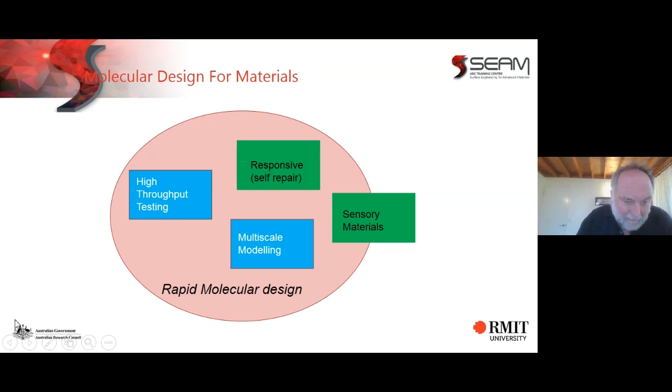Well, there's two methods. One is to do it virtually, by molecular modeling combined with atomic and larger scale modeling, so-called multiscale modeling, or to use high throughput or at least rapid testing to sort through this high level of design complexity. And why is that necessary? This talk, as you gathered from the title, is going to be predominantly about corrosion inhibitors.

Now, corrosion inhibitors are put in the primer of a paint film, or they may be used to passivate the metal surface before the primer goes on, or they may be used as a corrosion inhibiting compound sprayed on a surface, or if it is a pipeline or something like that, they may be injected into the liquid that the pipe is carrying. So there's a number of ways we may use corrosion inhibitors. In our case, we're predominantly talking about them in paint, and therefore they're predominantly in the primer.

So this was work done by Tim Harvey at CSIRO, looking at a family of inhibitors called the mercapto compounds. It's quite complicated, but all that I want you to really see is that if we change in small ways the inhibitor chemistry, we can dramatically change whether it is a corrosion inhibitor or in fact whether it promotes corrosion.

So up on the left-hand side is the different molecular structures, and down the right-hand bottom is the inhibition efficiency, where something on the top is between 90 to 100% efficient. That's a very good corrosion inhibitor, which will cut corrosion down to anywhere from 1 to 10%. If we're on the bottom of that graph, though, we're actually promoting corrosion.

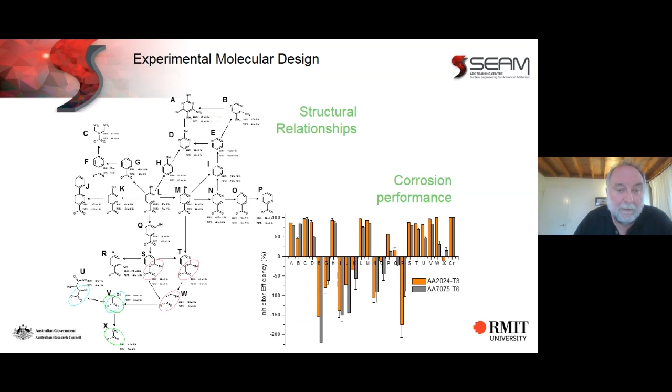And we can see that if we go from inhibitor D with the linker group to inhibitor E without our linker group, we dramatically shift the performance and go from quite a good inhibitor to a corrosion promoter. And similarly, other small changes in the molecular structure dramatically change how the inhibitor performs. So we need to get not only the right type of inhibitor, but the right isomer amongst the different families. So we've traditionally done that by high throughput experiment.

This was work that was developed by Paul White at CSIRO, and he used what is called the high throughput well technique. The wells, you put a saline solution in it, and you put the corrosion inhibitor in it. And then you see the color change after 24 hours.

Where the color has not changed substantially, there's been very little corrosion, and that's given a low number, indicating that protection of the surface was effective. Where there's a lot of change, a lot of corrosion, product builds up, that is showing that corrosion inhibition was not effective, and it's given a high number. So you end up with very complex diagrams like this.

This is deliberately made small, firstly to show you the amount of data, and secondly because this is data derived from Boeing by CSIRO and is confidential in nature. But these charts look at, in one of these squares here, we are literally looking at 1,000 tests. And so this is one test on one material, this is one test on another material, and then there are synergies between different tests. So you're literally at 4,000 pieces of data, 4,000 tests in this diagram.

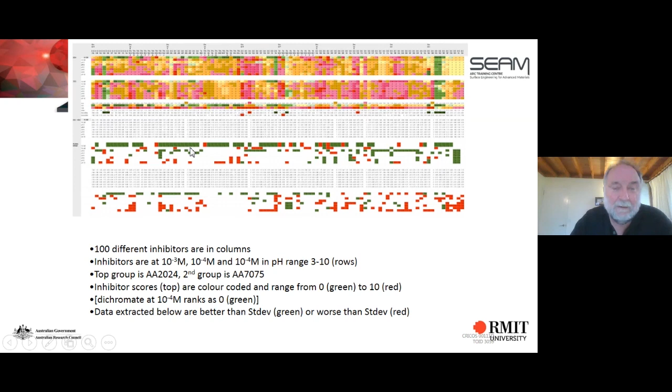And that allows us to spy out the green areas where inhibitors are forming well, and down below, spy out the green areas where combinations of inhibitors are forming well. By using these methods, we can relatively quickly, this program still took a number of years, find what the best inhibitors are, and very importantly, what the best synergy between different inhibitors are.

If you remember what we said before, where we're green on this little chart, I have numbers like 1 and 2, the inhibitor is very efficient. Where we're up at 8 or 9, then we're not stopping corrosion. And we can display that in this little graph down the bottom. The green squares are where inhibition is efficient, and the brown and purple ones are where they're not efficient.

What this shows is by combining an organic inhibitor, its structure's been taken away, with an inorganic one, we can get very strong synergies. So by itself, the organic inhibitor is effective to about 10 to the minus 4 molar in concentration. And the inorganic is not really effective at all. But combined, we can get the combination to be effective when the organic is 2 by 10 to the minus 5 molar, and the inorganic is 5 by 10 to the minus 5 molar.

Why are we so concerned about getting inhibition at low concentrations? Well, there are two reasons. Firstly, in general, as we raise the concentration, the efficiency will remain high. And secondly, when you put your inhibitor in a paint, it gradually leaches out. So the life of that protective paint film is tied to the minimum concentration of inhibitor required to protect the surface.

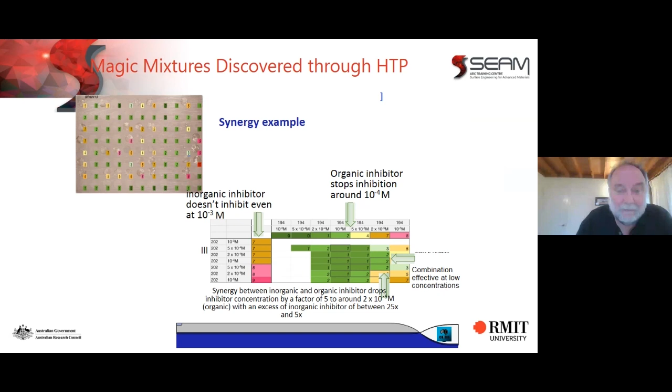Up to now, those surfaces have been protected by strontium chromate. And strontium chromate has done a marvelous job over the last 50 or 60 years. Unfortunately, strontium chromate is a human toxin, and so is being rightly phased out. So all around the world, people are looking at solutions to have non-toxic and at least close to green inhibitors to replace strontium chromate.

Okay, so by using high throughput methods, we can discover inhibitor systems that work in the laboratory. How do we know that they're actually going to work in field conditions? In particular, how do we know that if we paint an aircraft with a paint system containing an inhibited primer, it will protect the aircraft for the period required, which is generally around 20 years?

Now, with strontium chromate, we have a lot of experience, and we know from experience that it will work. We can do long-term tests, and it is mandatory to do at least 2 years of in-field testing for new paint systems for aircraft. However, we only want to go to that massive expense with the final down-selected inhibitor. All the rest, we want to be able to test virtually and know whether we're likely to get that 20-year performance. So how do we go about doing that?

The system that we developed, and this was again between CSIRO and Boeing, was to use multiscale modeling to connect the corrosion and environmental processes from the molecular scale literally up to the continental scale, so that we could be confident that we could accurately predict how an inhibitor in a primer on a paint film on an aircraft would perform over time. So these multiscale models contained a molecular part to look at the molecular features, the HOMO, the LUMO, the dipole, distribution around these molecules that you saw before.

They had part transport models to look at how the inhibitor would be transferred through the paint system and to cracks and other defects that occurred that were corrosion sites. They had a model looking at the alloy structure and looking at where those intermetallics, which provide strength but also act to stimulate corrosion, are. So that was the basic material structure. Then we needed to know what the environment was.

So we then started with looking at the flight path for the aircraft. For each different flight path, we looked at the pollutant level, aerosol levels, both marine and industrial that might impact on the aircraft, and the microclimate that would be developed in the aircraft. We combined then the microclimate and the material system to look at how corrosion might occur and then how that would progress over time to lead to damage. So combining these systems together, we could, to a reasonable degree, predict the life of the inhibited paint film.

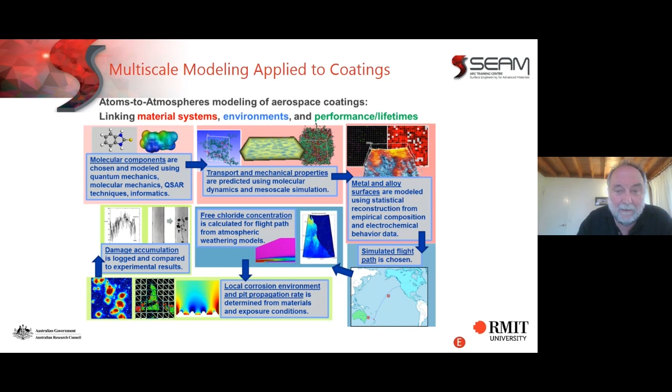So what were some of the components? First was the molecular modeling. We use DFT and other modeling to look at a number of features of our molecules. They're basically heterocyclic molecules with linker groups on them, and we could develop this DFT and do it quite rapidly, actually, and then link it to a supercomputer and build out our base of molecular properties.

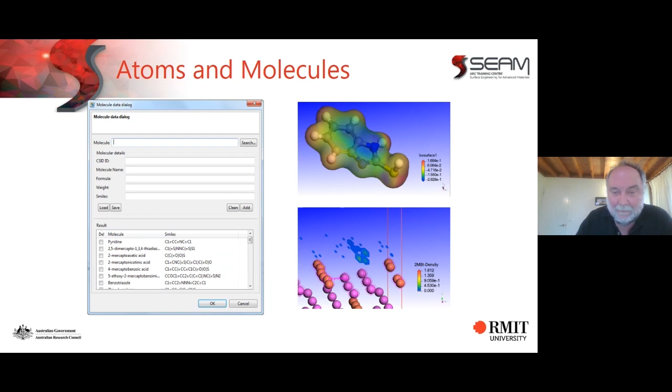One of the most famous molecular properties in the literature is the HOMO-LUMO gap. This is the highest occupied molecular orbital and the lowest unoccupied molecular orbital. The difference between that gap basically tells you, is the molecule electrophilic or not? Will it transfer its electrons to the metal surface and therefore bind to the metal surface? It was considered by many researchers that that would give us a very strong indication of whether the corrosion inhibitor would work or not.

So we tested that with our expanded database generated by the more rapid testing and the more rapid molecular modeling. And unfortunately, we found that when we plotted corrosion inhibition against this fundamental gap, we found virtually no correlation at all, despite what was in the literature. So this doesn't mean that it's not important, but it's not sufficiently important to describe the variation that occurs in corrosion inhibition. So then we look at, well, how else can we model corrosion inhibition?

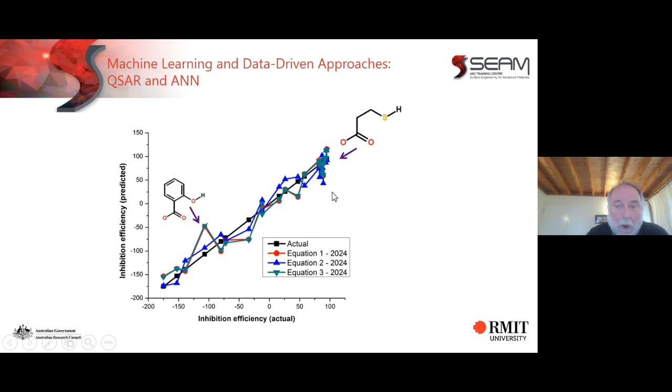And this is an example of the output from one of those models, the inhibition efficiency actual against the predicted one, using that combination of DFT derived parameters and SMILES derived molecular features. And we did obtain quite good models. And as we mentioned before, it tended to depend on whether there was a thiol group, a sulfur group, an oxygen group.

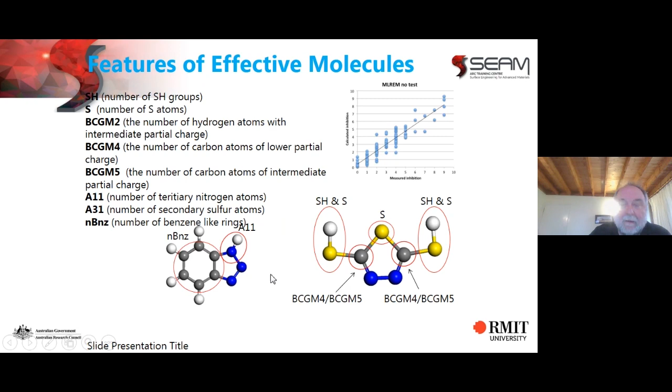Once we have the connection between molecular structure and electrochemical structure, we then need to know what the environment that paint film will be in. We had the advantage, particularly in the aircraft area, that we had been looking at aircraft corrosion in conjunction with different partners by placing sensors on aircraft.

This is one of the problems implicit in this, which we'll talk about later: these sensors are quite large and they're actually not measuring explicitly the corrosion of the surface. They're measuring corrosion on little coils or little bits of metals that we hope will simulate the surface. But we can measure the microclimate and the corrosion rate in the surface.

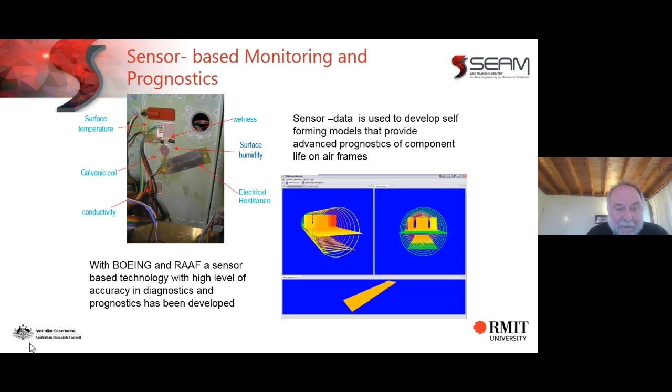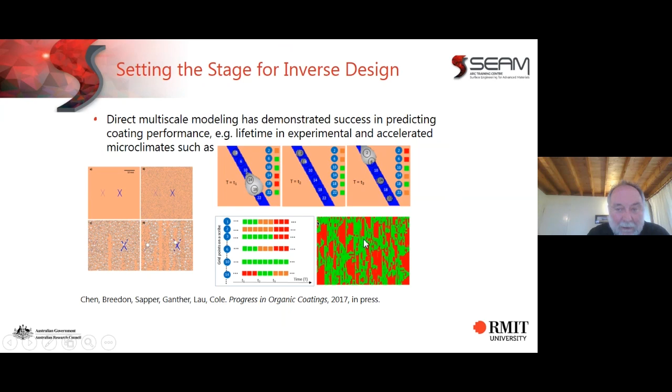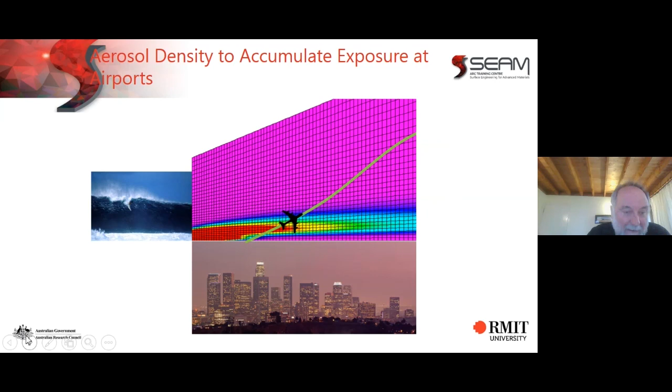Basically, we find that close to the sea, the red areas, airborne salinity is high, but the salinity is trapped by buildings and other structures. So by the time we get out to Tullamarine, it's dropped down to ground. But as the aircraft goes up into the sky, it goes through that scavenged area, up into the plume of aerosol, and picks up aerosol that will slowly but surely corrode the aircraft. So now we understand the microclimate that the aircraft goes through.

Now we need to simulate the metal structure, and we do this. We did a lot of work looking at atom probe to understand what the structure of our aluminium alloys were. And here in the light colours, you can see all the different intermetallics that are providing that strength to the aluminium, but are also acting as corrosion points. And we can generalize this into a generalized microstructure, which we then did.

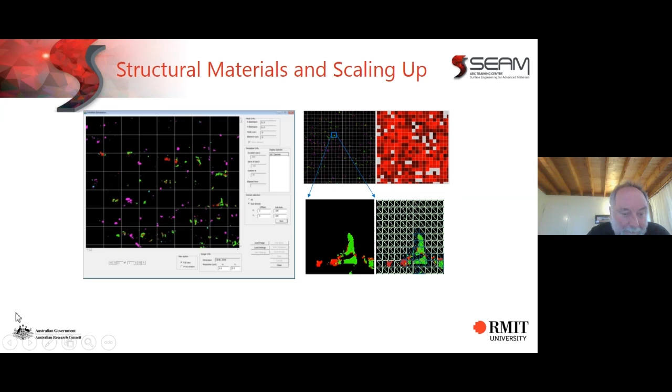And for each of those intermetallics, we build a little corrosion model and look at how the corrosion rate occurs, and also how the inhibitor can slow down that corrosion rate. Having combined all that, we can then look at the life of the inhibited paint film, and we can look at it as a function of the flight pattern of the aircraft.

Now, this was not so much a test, but a problem: they had the same aircraft flying on two different routes, but they found that one of the aircraft was corroding at a faster rate than the other, and they couldn't understand why. So they came to us and said, airplane number 2 flying on these routes is not corroding, whereas aircraft 1 flying on these routes is.

So we put that into our system, and we found that this was the probability of pit growth from corrosion on aircraft 1 in the red, and in the blue is aircraft 2. So you can see, just as we were told, that the corrosion was occurring much faster on aircraft 1.

Analysing the pattern, it's because aircraft 1 has these excursions much more into southern Australia. The roaring 40s are coming across Australia, hitting the coast of Tasmania and Victoria and South Australia, generating a lot of marine aerosol and therefore a lot of corrosion, whereas aircraft 2 spends a lot of time in Western Australia where it's dry, there's very little salt aerosol and corrosion is low.

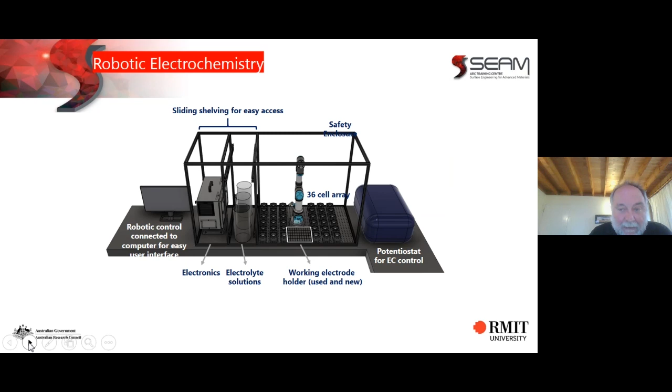We had developed at CSIRO and are redeveloping at RMIT an electrochemical robot where we have a robot head that goes between each of our cells. It can measure 36 cells at once, and therefore we can generate that rapid experimental data, but we can do it by getting full electrochemical data and therefore having a lot to analyze as well. Going to skip this session, very interesting, but I'm running out of time.

Next area just to tack on, I mentioned before, all our sensors to measure corrosion are actually not measuring corrosion of the metal itself, but they're measuring corrosion of a physical sensor adjacent to metal. One way we began for this was by developing nanodots. A nanodot might be a semiconductor dot like cadmium selenide, zinc sulfide, or carbon dots.

Basically, what these dots are is they fluoresce at particular frequencies, and when particular metal ions come in contact, that fluorescence drops. There are particular ways to sensitize these dots for particular metals, but basically we could use the fluorescence of a dot to measure metal ion concentration.

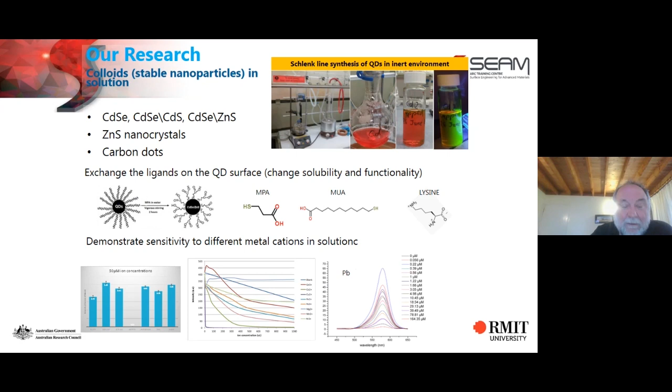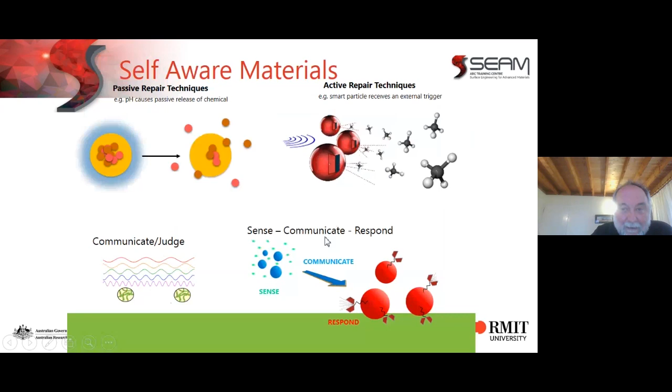And we've done that with our partners to look at how corrosion is occurring in a paint film and to have a direct measure of corrosion and a direct measure of the life of the film. We could also put that on a little chip and develop a multi-analytical sensor as well. That's probably a story for another time. I'll skip that. Interesting it is, but I'm running out of time.

So molecular design, if we're going to have it, we need fast methods of appraisal. We also need to know how the component will actually perform in service. Computational design can connect our molecular modeling to engineering scales, and it can sort out what would be possible viable inhibitor solutions, although we'll still have to go and do the compulsory 2-year testing on the ones that we down select.

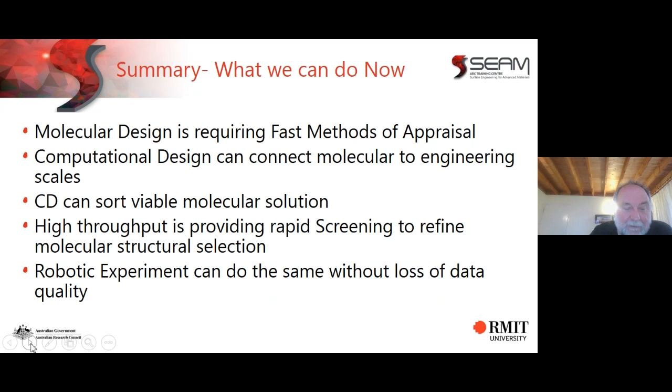The high throughput is providing a rapid screening method to refine molecular structural selection, and the robotic experiment can do the same without loss of data. So what we want to do in the future is build computational systems that can integrate new models and data across the globe, build robotic systems that can be integrated in computational systems to self-build models. Integrate nanoscale sensing into robotic systems and build new materials that can measure, compute and respond on the nanoscale.

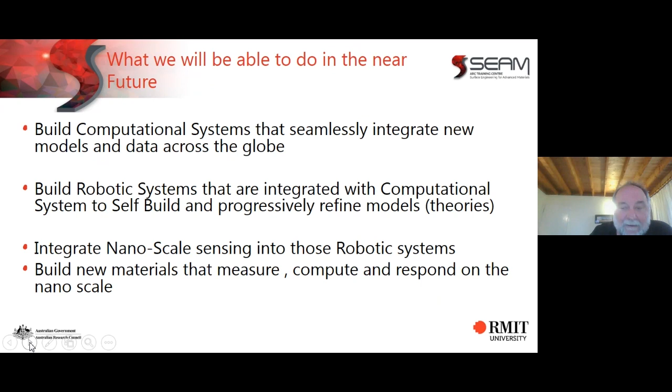So as many researchers have done, I've talked in a fairly rosy way about what we've done and what is possible. As this is amongst our friends in SEAM, I'm actually now going to go and highlight some of the issues.

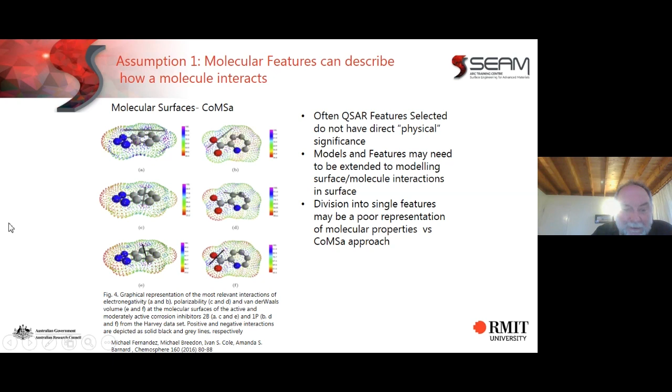Firstly, on the molecular modeling, we showed you that firstly the HOMO-LUMO is insufficient, and then we added different molecular features. What we need to understand inherently is what the spatial geometry is. This is some work done by Michael Fernandez at CSIRO, looking at how we can use QSAR to look at the geometry of different features, the iso distributions and dipole distributions, and see if that geometry can provide us a more nuanced level than just single features like HOMO and LUMO.

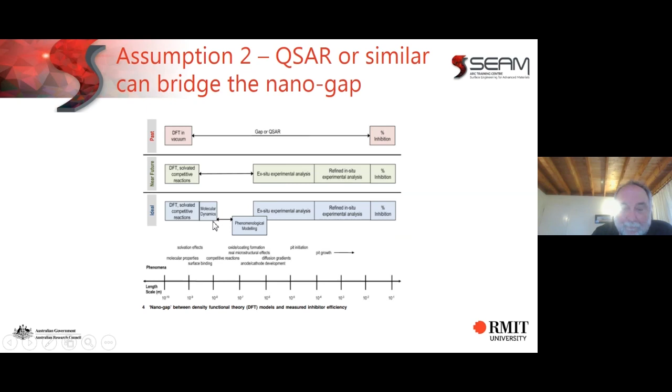Generally, we measure inhibition either on an exposed plate, which is 100 by 150 millimeters, or on an electrochemical coupon, which is a bit smaller, but still 20 mils, which is much bigger than our DFT experiments. We could do refined analysis, local analysis on our features, and we could also expand out our DFT modeling to try and close that gap.

The molecular modeling we did was in vacuum, and therefore did not take into account the complexity of binding to surfaces or the complexity of solvation and hydration and deprotonation. Many molecular processes could not be taken into account.

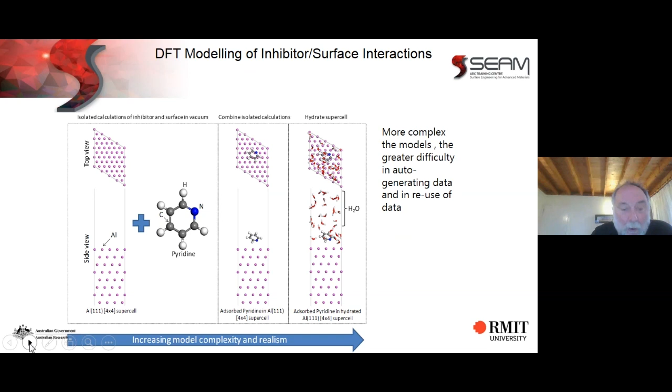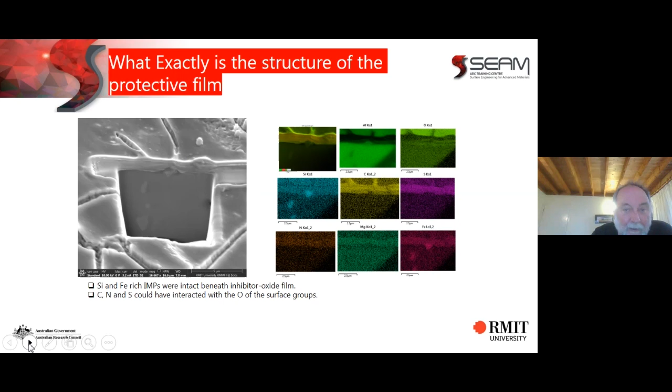Further, I talked a little and showed you this slide before of what actually happens on a surface. We have different intermetallics. They can behave as anodes or cathodes, but in general, our inhibition value is just for the whole surface. And it ignores the fine features of what the individual inhibitors are doing. So we need to drop down to this fine layer of electrochemistry.

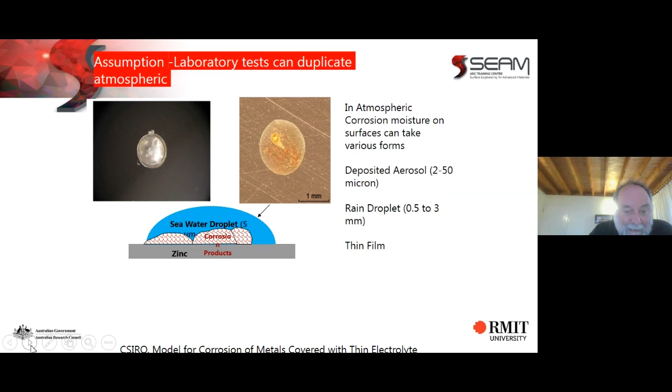And our experiments were derived from electrochemistry in solution, when in fact corrosion mainly occurs by fine droplets. The droplets are in two ranges, 2 to 50 microns is the deposited aerosol, or 0.5 to 3 millimeters if they are raindrops. Whereas experiments, as we mentioned, are in solution in microliter amounts. So there's quite a different scale between our electrochemical test and what actually happens on the surface.

Lastly, I talked about us understanding the microclimate in aircraft. That's true, but only to approximation. Our work and all the work preceding us places sensors in aircraft and predicts the microclimate based on those sensors. It assumes that the space in an aircraft is generally uniform.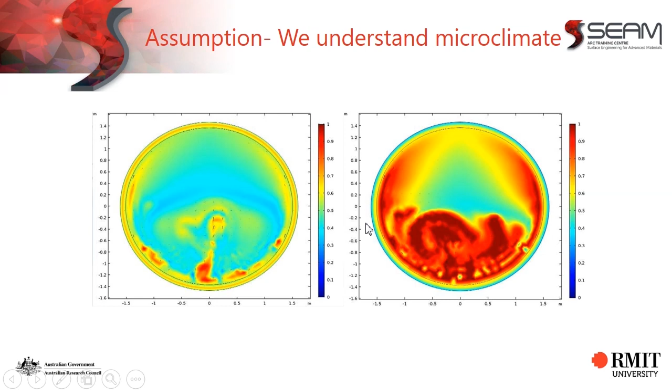This is some CFD modeling done by Patel, looking at the air distribution and the relative humidity distribution in an aircraft, and what you can see is it's very far from uniform. So if you were placing your humidity sensors and your wetness sensors at one point, you could be measuring quite a different condition to somewhere else in that space. So we need to refine these models as well.

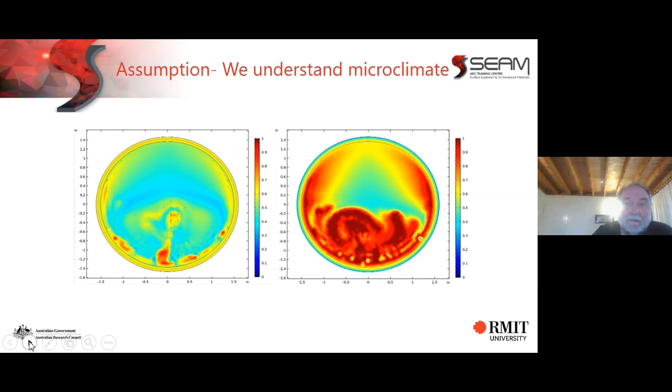So where have we got to? We have developed an original computational framework. That's a bold step forward. However, there are problems. We need to extend our molecular modeling. We need to refine our electrochemical experimentation. And we need to know what exact test methodologies will give us the best prediction of inhibitor and surface.

We are actually working on this. We have both PhD projects, but also a major project with BASF. So we are working to refine our molecular modeling to better consider the complexity of the molecular form and surface interaction. We are working to reduce that nano gap, both at the experimental level and at the molecular level.

And we're hoping to build a new conceptual framework that gives a deeper understanding of the multi-scale and interrelated processes that control corrosion. So I will finish the presentation here. I hope to illustrate that this is a cup which is 2/3 full. We can do quite good predictions of real service life of inhibited paint films, but there are a number of problems to resolve to improve the fidelity and reproducibility of both the experimental work and the modeling work.

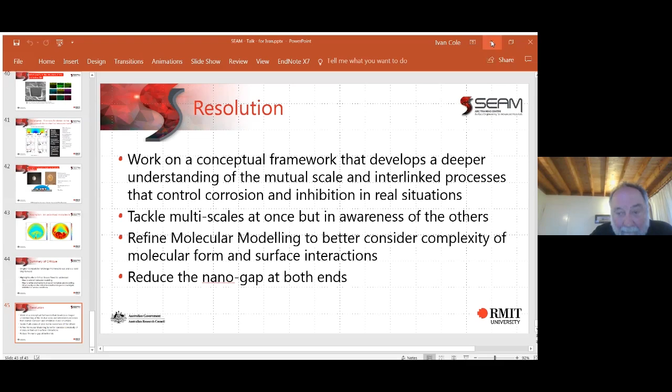Right. So this is from Reza Parvizi from Deakin University. Her question: is there a capability to utilize ultra-high resolution techniques such as atom probe tomography to investigate and validate atomic scale simulation of inhibitor microstructure interactions and adsorption mechanisms?

Yes, it is possible, particularly the microstructures we develop by using the atom probe and to understand that. It's hard to make a generalization because it depends upon what the atom probe will do to the organic bound to the inhibitor or bound to the surface. But yes, in general, you can detect, for instance, sulfur on the metal surface, and the sulfur is indicating the presence of organic functional groups. So atom probe is useful to find out where the inhibitor is bound.

So this next question is from Niraj Sharma. Can we simulate the corrosion rate of aerospace material depending upon the environment it passes through? How successful are in vitro testings for this? So certainly we can, to a first approximation, simulate the corrosion rate in aerospace components. Yes, that was the aim of the project, but I'm a little bit confused by the in vitro. That's not a term I would normally apply to aerospace.